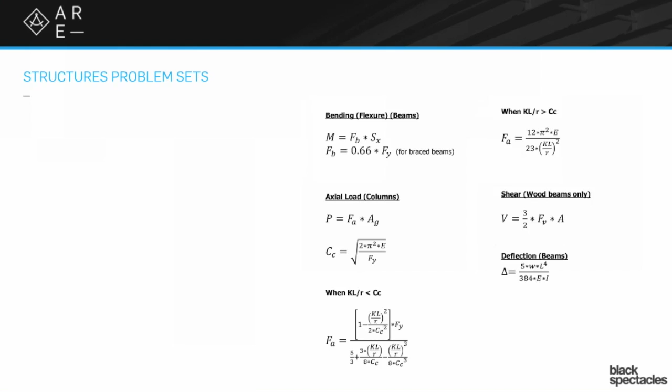And in the middle of some of the questions that we sent out to everybody before we started, we have some charts and things because you can use those along the way. So these are some of the formulas we might reference back to. But let's start in with the first one.

So on our first one, the question is, where in the beam shown is the moment the highest? Heather: You can use intuition a little bit on this particular problem because as you can see by the dimensions of where the loads are located, everything is symmetric about the beam.

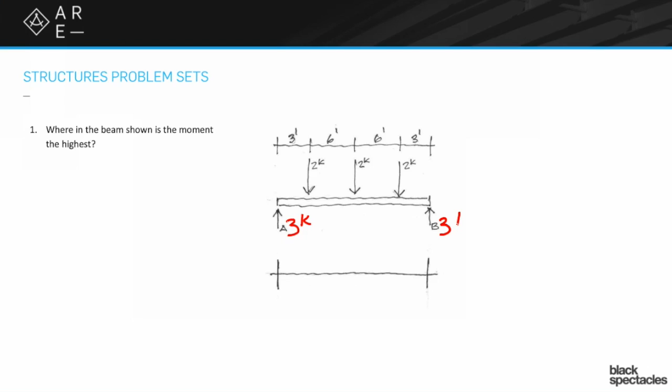By intuition, you can figure out what the reactions on each end are, and they are going to equal 3 kips apiece because I just took the 6 kips total applied to that beam and divided it in half, since everything is symmetric.

If you feel comfortable going by intuition, you will ultimately come to the answer that the moment is highest right here at midspan. But for those of you who don't feel comfortable doing it that way and want a bit of the math behind it, we're going to show you how you can get there.

So the thing that'll get us there is we're going to draw the shear diagram for this beam—I've always been curious why you use V for shear, but that's one of those engineer speak things. We're going to start the shear diagram and follow the loads: go up 3 kips, and since there's no load applied, go straight across, then come down 2 kips.

So we come down 2 kips, then go across again until we hit the next load, and come down 2 kips, which takes us across the 0 line and puts us at -1. Then we go straight across, down 2 kips, straight across, and close it up with that last 3 kips.

Now, the one thing to know about your shear diagrams is whenever that shear diagram crosses 0—this point right here—that is your maximum moment. So when that shear diagram crossed the 0 line, we essentially just answered the actual question right there.

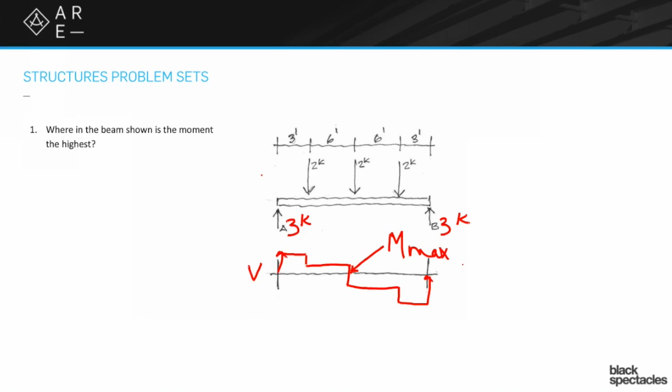It happens to be right in the middle because this one is symmetrically loaded, and you could have guessed that beforehand if you'd been thinking about it. But this is a clear description of why that's the case. So let's move on to the next question.

Why don't we go ahead and draw the moment diagram? Okay, so let's do that—just for fun, because what could be more fun than drawing a moment diagram?

So yes, we are going to draw that moment diagram, and you need to know a couple of things that I'll describe along the way. The first is to figure out what number you're going to go up to—we're going to take the area underneath this shear diagram.

So we basically have a 3—we went up 3, so this value here is 3. And you're going to take the area of it, so it's 3 times 3, which is 9. And whenever you have a straight across, a box shape in your shear diagram, you're going to get a diagonal line in your moment diagram.

So we're going to go up to 9, and then keep doing the math—this is 1, and it's 6 feet long, so we're going to go up another 6 to the center, bringing us up to 15.

So you're kind of separating those out as different boxes—the first one was the 3 kip amount over the first 3 feet, then you jump to the next box, which was 6 feet long but only 1 kip high. Right, and you're just adding it up as you go along.

And then because we crossed the 0 line, these are all negative, so we're basically going to come down those same numbers. You're going to come down a total of 6 to +9, and then come down the rest of the way to 0. That line probably shouldn't have been so straight looking, but there you go.

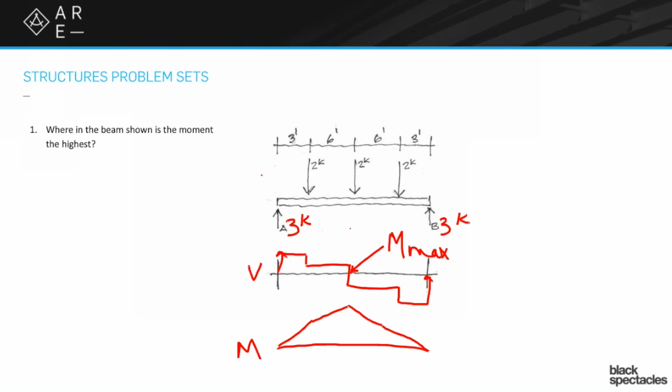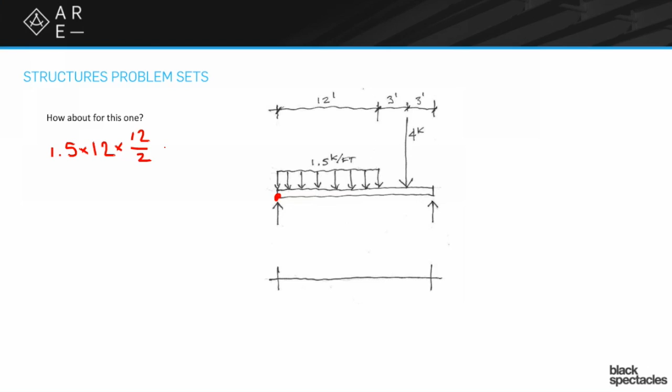So it's 6 feet. The first 1.5 times 12 is actually the total load that you're talking about. The 12 foot is, because it's 1.5 kips per foot, in order to know the total load of that particular one, you have to multiply it by the 12 feet. But then the moment arm is half of that distance. And so keep going with the next set of loads.

So the 1.5 kip per foot is going to act in the same direction as that 4 kip load, and it is acting 15 feet away from this left end. When we do this, all of this has to sum up to 0, because otherwise we don't have a static beam here. You don't want your beam galloping down the road, flipping around. So I'm going to call this other end here B, just to give us a value, but it is acting in the opposite direction that the other two loads are. So it's going to have a minus sign, and it is acting at, let's see, that's 6 and 12, that's 18 feet.

And when you solve for B, it actually comes up to 9.33 kips. Then you can sum your forces in the vertical by saying this 4 kips plus the 1.5 times 12 to get it to a total load, and then subtracting off the 9.33 gets you to the reaction over here, which is 12.67.

So when we draw our shear diagram here, we're going to start doing it the same way we did the other one. So we're going to go straight up because we've got that 12.67 kip reaction, but we have a distributed load, so you got to treat that a little differently, because every foot you're taking off more load. It's not like this concentrated load where it happens all at once. So because it's a distributed load, I'm just going to draw some guidelines in here for myself because that's how I do things.

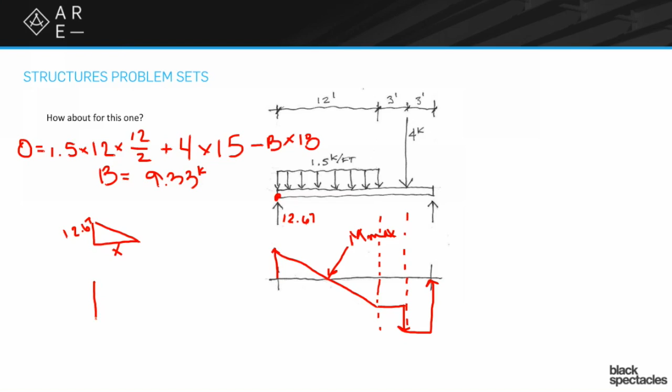But we have to figure out what it is, and there's a couple of different ways you can do it. I like to use similar triangles because it's graphic for me. So I have one triangle that's 12.67 over some unknown value, but my other triangle has to be the whole thing, the total of 12 feet down here, but it's 12.67 plus the 5.33. When you solve, you can do your ratios and solve for x, and you get a value of x, which is 8.45 feet. That's how far away from this left end that point of zero shear is.

And so that tells us our basic question, which was, where is the highest amount of moment? Correct. And we figured that out through a combination of using the shear diagram, understanding what the shear diagram was telling us, and then doing a kind of quick, fast graphic version.

But we also could have done a moment diagram. We could have done a sum of moments and then figured out distances. There's a series of other things we could figure out as well. I guess the one thing this helps you with is, yes, you could have drawn that moment diagram, but if you're feeling crunched and frantic because of time, don't feel like you have to do that. By knowing that your point of zero shear is your maximum moment, you've saved yourself some time.

But just because we're masochists like this, let's go ahead and show that, just to have a moment to discuss what these things look like. So now, again, we have to think about that the point of moment is based on the area underneath this. I haven't done this math, so I'm not going to put values down, but I'm going to draw what the diagram looks like. Yeah, so this is just sort of approximate.

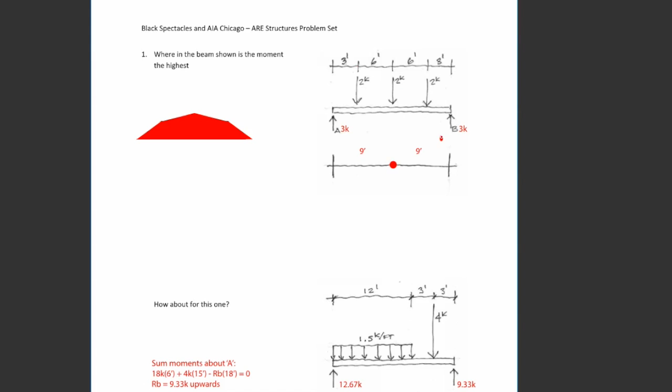Okay, so on the first one, looks like Spencer got it pretty spot on. In fact, his drawing looks a little better than ours. Let me take a look at the next one. Okay, here's the next one. We got the reactions right, and he didn't draw the shear diagram, but it looks like he got the end value. Yep, it all looks pretty good. You can see all calculations there, and he's summing all the forces.

And again, this is one of those things, you don't necessarily need to do the moment diagram in order to understand where the maximum moment is, as long as you understand the relationship between the moment diagram and the shear diagram, which obviously is also related to the loading diagram. Okay, way to go, Spencer.

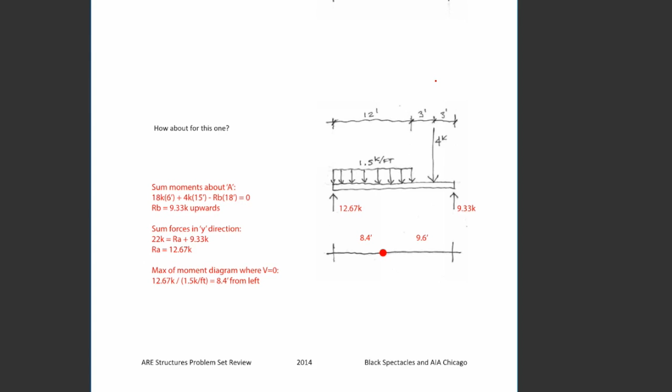All right, let's go back to the things here. All right, and going on to problem number 2.

Problem number 2: you were working on a hospital in Japan in an area of high seismic risk. At a preliminary design review, there are various concepts being considered. Which is the most sensible approach? We've got an 8-story L-shaped building, a 6-story symmetrical plus-shaped building, a square building, and the rather restrictive option that you should not build a hospital in a seismic zone.

What do you say about the L-shaped building? Well, the L-shaped building could work. It has one piece to it that we don't like as much as the rest, and that is this little inside corner here. If you imagine grabbing this end and this end and wanting to move them back and forth, you'll see that this spot right here just kind of wants to rip apart right through there. Not that you can't build this way, but it wouldn't be my favorite choice. You'd have to put a lot of extra structure in there in order to do that.

So what you're essentially saying is that each of those wings is going to start shaking on its own, and they're going to kind of crunch into each other at that inside corner. If you really like this choice, I would probably say build it this way, where you see a joint between the two, so they have a way to move separately and not hurt each other.

Exactly. How about the plus? Well, the plus is going to be obviously the same thing, just 4 times, right? Yep, exactly. The plus has a lot of what we call inside corners, or re-entrant corners. From some of the handout material that you sent out, there are some code tables that were pulled together, and it's one of those things we have to design around and make the structure more robust, so we're spending more money on structure instead of all the pretty architecture.

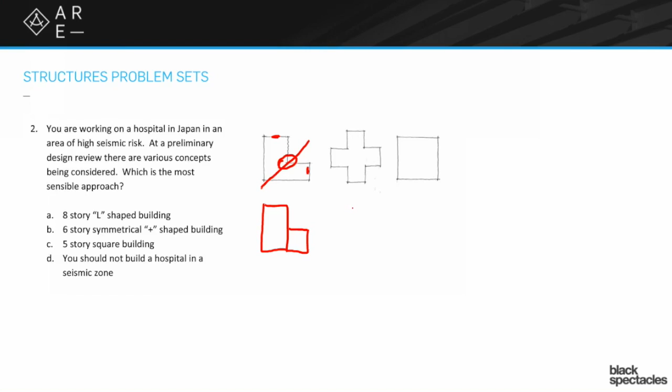And that's what we like, pretty architecture. So if you look in the problem set handout, there's a couple of sheets in there that give a bit more information about re-entrant corners and things like that. So obviously we're coming down to it.

C is clearly the answer, the square-shaped building. And the reason for that is just because it's all going to move as one. Yeah, and it's symmetric, so we love symmetry for seismic issues. It allows us to be centered, if you will, about where the mass of the building is going to work, and that's usually pretty close to the center of a square. So yeah, our choice would be the square.

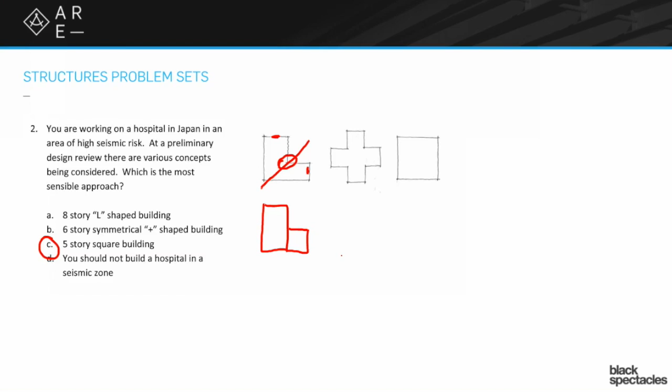One of the things you'll find is that often on the exam, there'll be things that say you should not build this or do that, and those are not usually logical answers. They may seem logical at different points, but you can always do it. It's just a matter of where you want to spend the money. Since the exam is often about the idea of efficiency, this is a good example of why D is just not a reasonable answer in this context. All right, let's move on to the next one.

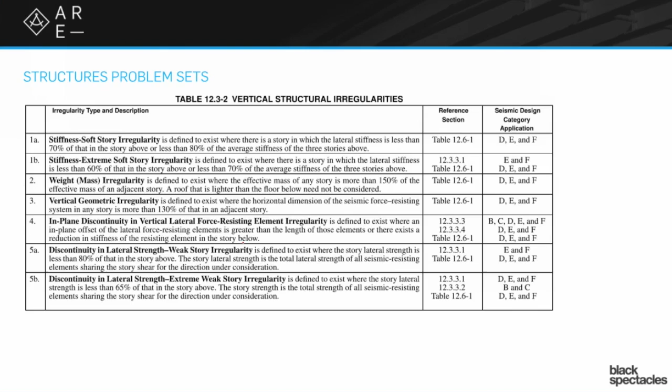So these are the code tables we were mentioning. Right, so these are in your handout. There's a couple different code tables that you can look at. So here's question number 3.

Question number 3: the contractor is about to place the concrete for a complicated but important structural wall, but something seems a bit off and you are worried. Which concrete test would you look at first for reassurance? We have a couple different answers: hydration test, core test, slump cone test, cylinder tests, and penetration test.

So the key thing here when reading this question is that time seems of the essence, that something's wrong, and before things get too set in place, you want to check if things are going reasonably correct. A couple things we can do right off the bat is get rid of a few of these choices. One we can get rid of is A, because hydration test I just made up.

So that's not a real thing. Maybe it's a real thing, I don't know. Maybe it is, but I made it up either way. And then core test and penetration test, those are things you would do down the road.

The core test would be something you do on an existing structure to figure out what your concrete strength might be. That'd be one way to do it, if something was going wrong and you wanted to test it, or maybe it's an existing building and you're trying to see if you can add more load to it. So the core test is a real thing, but it's just not something you'd do in the way the question described.

I think the penetration test is sort of similar. So the two main ones you're likely to be asked about would be the slump cone test and the cylinder test. The slump cone test is where you have a cone-shaped formwork piece, about 12 inches tall. You put in concrete from a particular truckload that's about to go into place, then flip the cone over and lift it off, and see how much it slumps down.

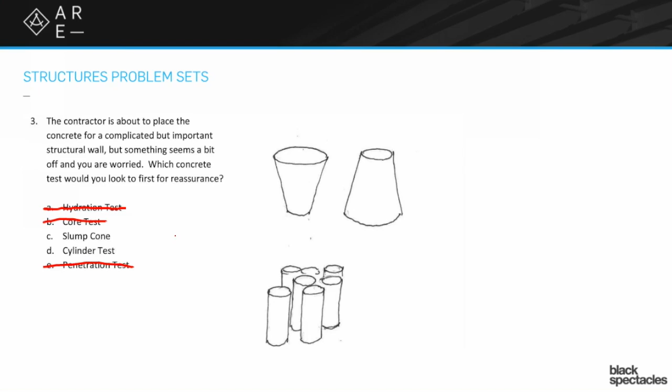Well, that's great, but as Heather says, that's 28 days later, maybe 7 days later. You might do an early test because you can get a pretty good sense of it, but it's probably way later. So the way the question was worded, talking about 'I'm worried, I want to find out what's going on,' the slump test is definitely more useful in that context. And I can guarantee you there'll be questions about slump tests and cylinder tests somewhere. I'm not sure how it'll be worded, but there'll be something, because it's kind of a key one.

Right, how did Spencer do? Let's take a look and see what happened with Spencer. I'm going to have to bump forward a couple here, but let's see how it goes.

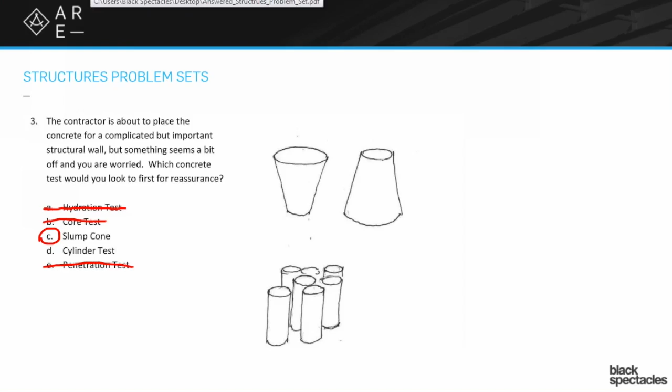So let's see, you got the square building, and Spencer got it right. All right, you're doing great, Spence.

All right, let's jump on to question number 4. This one's going to take a little bit of calculation. The framing plan shown is for a 2-story simple light manufacturing building. The loads are axial loads only: live load of the second floor is 80 PSF, dead load of the second floor is 20 PSF, live load of the roof is 30 PSF, dead load of the roof is 20 PSF. We're going to ignore the first floor slab on grade since it's being held up by the ground below.

So we have 2 basic questions here. The first one is, what is the total load of the column that's been indicated? So what's the first thing we need to figure out? Well, first you need to know all these loads, and we're going to add those up in just a moment. But the big thing to understand is how the load even gets to the column. The big key word here is tributary area.

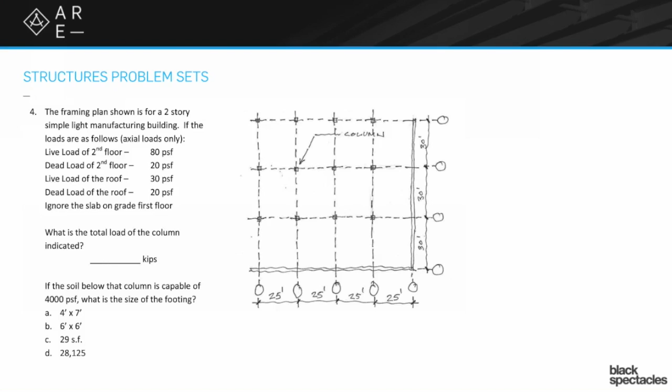Basically we are going to have half of the bay in each direction. I'm just going to draw a square here for you - this is basically the trib area that column is going to see. So half of the 25-foot bay in each direction and half of the 30-foot bay in each direction is going to contribute to the load that goes down that column.

So we know the area is the 25 and the 30, and we're going to multiply it by our load. Doing some addition: 80 and 20, that's 100, and another 50, so that's 150 PSF. You could do this by calculating the second floor load and the roof load separately and adding them together, but what I'm doing is just putting it all into one calculation since we just wanted the load at the bottom - a little shortcut. If you add them all up and multiply that by the area, that gives you the 112,500 pounds.

Right now, if you notice, you want your answer in kips, but right now all my units are in pounds. So you will have to divide - for those that maybe aren't as aware, there are 1,000 pounds in one kip, so we have to divide this whole thing by 1,000. Our final answer here is 112.5 kips coming down that column.

This is one of those things you have to definitely be watchful for, because while they're not generally trying to go out of their way to confuse you or be mean about it, there often are answers that, if you didn't notice the word kip, would be a version very close in pounds. So it's kind of taunting you to choose the pounds one, even though it says kips. You have to be really careful about matching kips and pounds, feet and inches - all these kinds of issues show up all the time on this. Units are a huge deal.

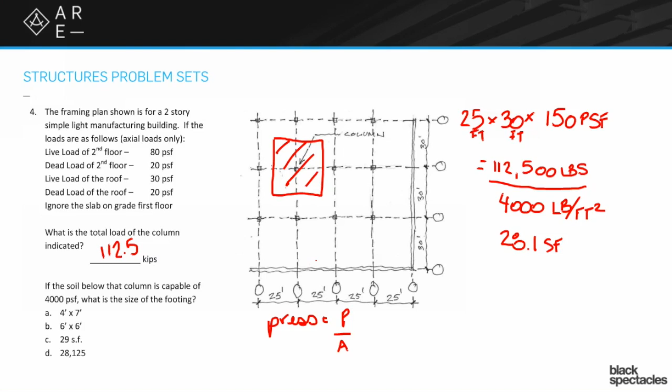But the 29 square feet sure looks pretty good because that's just bigger than the 28.1. So that's really the answer. Some folks may have seen a different possible answer. So let's take a look at what our submitted one said. Let's see what they liked. If I can get this to work. Oh, there you go. It's all Heather's problem. All right, here we go.

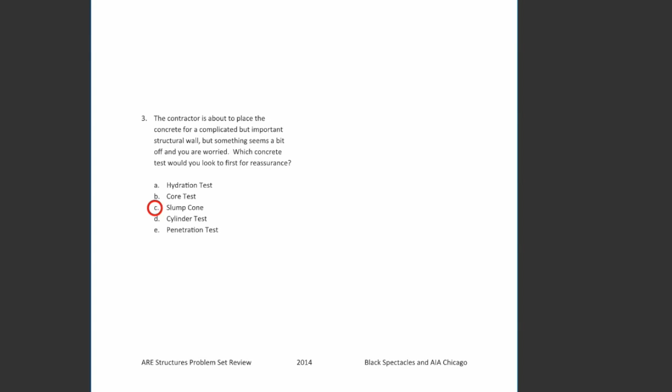So on this answer, they chose 6 by 6, which is an interesting answer because, on the exam, there will often be more than one correct answer. And in my mind, the 6 by 6 is a correct answer. It's just not as correct as the 29 square feet answer.

The reason I'd say that is anybody who's actually done concrete work knows that if you start giving people an answer like the footing should be 5 feet 2 and 5/8 inches, yeah, they don't build to that. They just don't build to that. It's just not how concrete works. So generally you're going to round up, maybe to a 6-inch line or maybe a foot line, something like that. Maybe if you're being more tight and controlled, maybe every 2 inches or something. But a 6-inch thing would be fairly typical.

So I could imagine that if our answer is really 28.1 square feet, you start thinking, well, how big is that? If we did 5 by 5, is that big enough? Well, no, that's 25 square feet. So it's not 5 by 5, it's the next one, it's 6 by 6. So it's a reasonable answer, but it's just a little too wasteful in the context of the exam. If it had said 5'6" by 5'6", that'd be a closer bet and I think that might be a reasonable answer. I think the 6 by 6 is just a little too far off, but you can see why they answered it this way.

And looking at D as an answer, it's the math, it just has a units issue in it. It's just a unit issue, right? Because that's exactly - that's one there to taunt you to do it wrong. All right, let's go on to the next one.

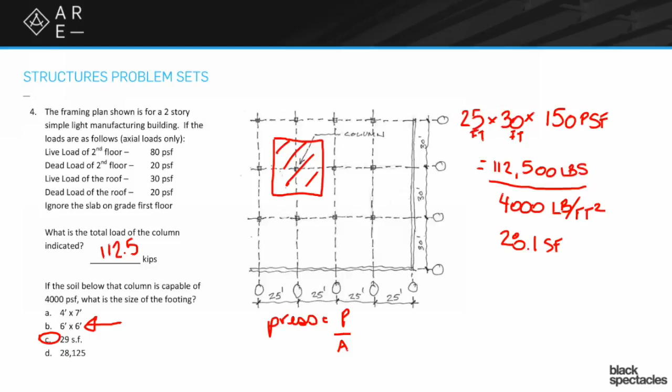Okay, so this is number 5. You're in the middle of the SD, schematic design part of the set, and the architect realizes that zoning height limitations may be a problem, and therefore must get a reasonably accurate typical floor-to-floor height for the design on a mid-rise office building, presuming a 1 kip per foot loading, and that the beams are 20 feet long. You are likely to use A50 steel. What wide flange would you use?

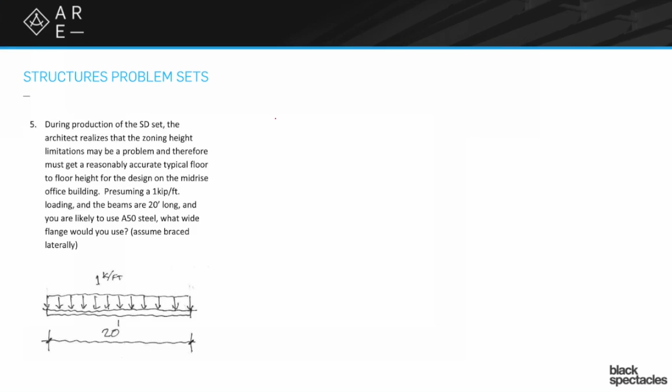So, okay, there's a couple of things. For one, we have to do some quick calculations. We do, yes. And then beyond that, we're going to have to do some other stuff as well. Yes, we are. So let's just dive right on in. So one of the equations you're going to need to know is moment for a simple span beam with a uniform load.

And you've hopefully come across this once in your lifetime, but WL²/8 is the moment equation. Like I said, most of the time the formulas will be given to you and you don't really need to worry too much about it. You can actually find them, but there are some that are probably worth just memorizing to have in the back of your head. This would be one of those, because it just shows up enough, and why make it more complicated?

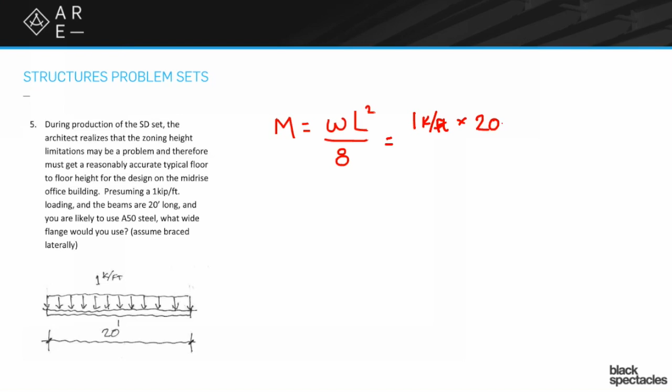So now we're going to just do the math, and we have this happening. And you end up getting, I believe it's 50, if my notes read correctly. Yep, so we have a moment of 50 kip-feet.

And we have some critical information, before we flip to the next page, which will help us pick our beam size: it tells us we're going to use A50 steel. So it's 50 KSI steel, and it also says we're fully braced laterally, which means you don't have to worry about not choosing the best beam you possibly could, because it's nicely braced. So that's a typical situation for a beam like this.

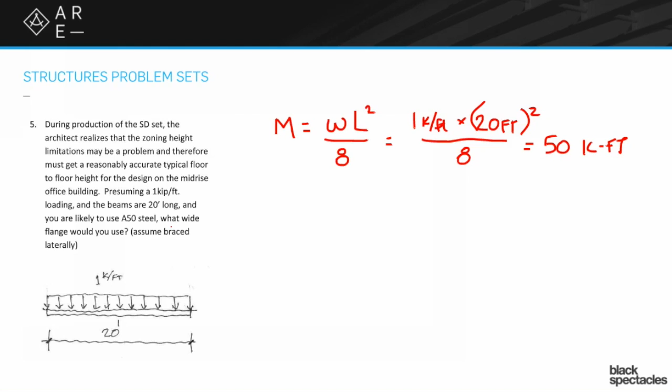So here goes the key thing to understand about wide flanges and the idea of efficiency, especially regarding the exam. When you're talking about structures and efficiency, you're essentially talking about dollars. Well, how do you understand dollars in steel? It's about weight. And since the wide flange—the first number is the nominal height, the second number is the weight per linear foot—if it's a higher weight per linear foot, it costs more.

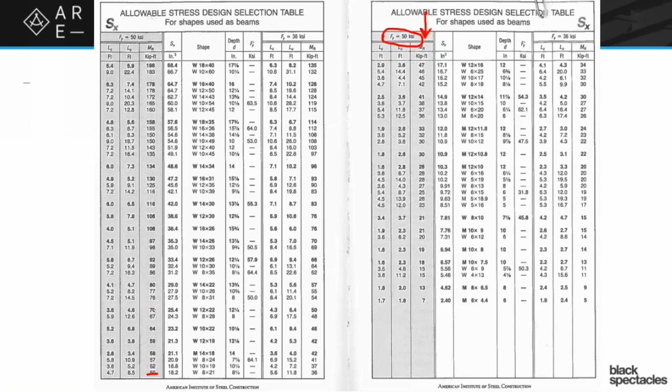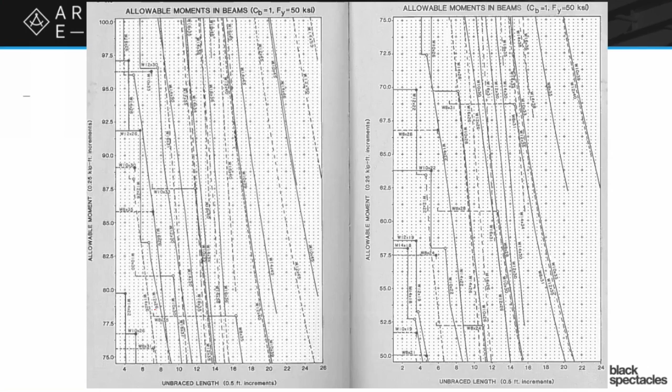Okay, so number 6: which is most likely not to have camber built in? Our choices are composite deck, double T, open web steel LH joists, and wood glulam.

So the first question here is, what the heck is camber? Camber is a natural crown, kind of like this picture shows, where the piece isn't going to come out flat—it's going to have an upward bend to it. One reason we like that is if you think about long spans, if you start out flat, it's only going to keep deflecting downward. So we like to start with an upward crown.

That way, when you start loading—get your roofing on a big stadium or something—it'll bring it down a little bit, and you won't have ponding issues when it wants to rain. So it starts crowned upward, and by the time it gets real loading, it loads into flat-ish. And some are more crowned than others, it kind of depends on the situation. But the concept of camber is that idea of crowning it up a little bit.

So then the question is, of these, which ones are often crowned? Let's jump to double T for a second—what the heck is a double T? It's this shape over here where it's got two stems and a flange.

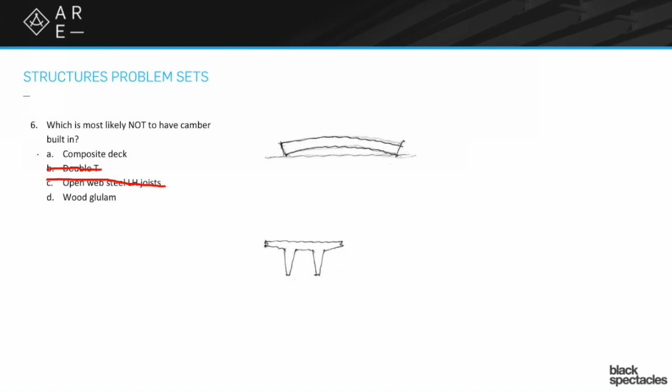What do you want to say about the wood glulam? Well, wood glulam is a manufactured product, so if you wanted to put a camber into it, you certainly can. It's an easy material to put camber into. Because you're making it up, right? Yep, it's one of the ways you can give that wood glulam that little extra boost of capacity, by building in that camber. Then when it does deflect, because it is wood after all, it'll deflect some, and it'll deflect to flat. So while it won't necessarily happen every time, sometimes wood glulams are used more decoratively than for serious levels of structure. But when you talk about a glulam, you're generally talking about a pretty serious structure, and it's very likely to have camber. So we are left once again with A, the composite deck.

So tell me about the composite deck. A composite deck is the fluted material you put on top of your actual structure, which is a lot of times beams. And we don't like to roll deck, it's a difficult material to roll. So if you were just looking at these, I would ask myself, which of these can I actually camber? This one pops immediately into my mind as something that, while you could camber it, it's very difficult to camber. And it would be hard to judge how much you had cambered it. One of the things, though, not to be confusing about: a composite beam system typically does have camber in the beams.

Because you're getting the benefit out of the concrete in the deck, while it's under a wet condition, it needs a little bit of oomph to not deflect and have this big ponding situation in the concrete. So if this had said not a composite deck, but the composite beam system, then that also could have had camber in it. Correct, but because it was just talking about the deck, that may be a little bit of a cheat. I don't know, I think it's a reasonable response.

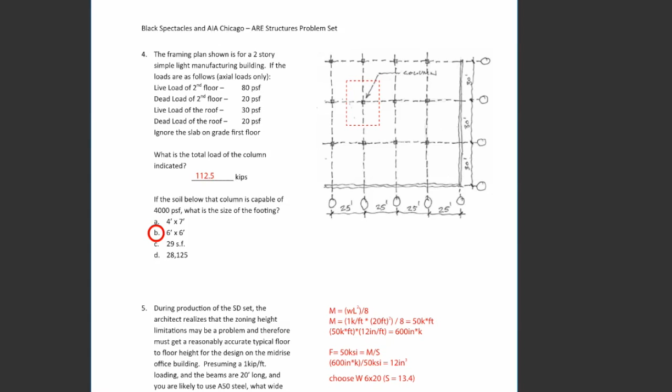So shall we take a look at how Spencer did? Let's see here. So this is the previous one, let's look at this. Yep, you got composite deck. So he's just batting almost 1,000 here. Yes, he's awesome, doing quite well.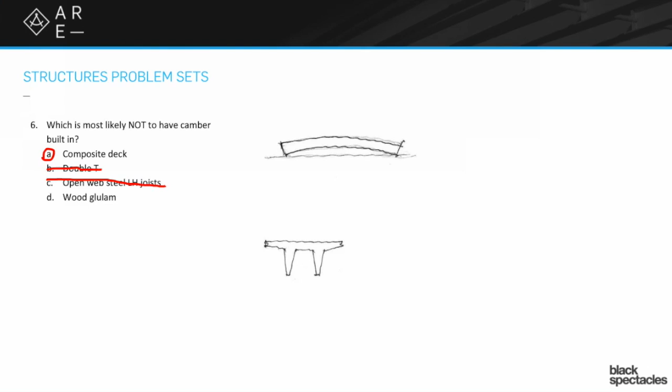All right, so let's jump to question 7. So question 7: you have a wood structure, and the engineer says that the horizontal shear stress capacity of the 2x12s is lacking, but you don't trust her. Huh, I wonder who we could be talking about. As she has been on Facebook. Not me, I have been on Facebook all day. As she's been on Facebook during the entire conversation, you decide to check for yourself. If the highest shear stress allowable for Douglas fir larch is 180 psi, then does this loading work?

And so we have a beam here. It's intriguingly symmetrically loaded, I love it. So tell me about it. Okay, so we need to think about what is the shear through this beam. The maximum shear through a beam like this is going to be at its end span. So by seeing that it's symmetric, I'm just going to use my judgment and say that it has 1 kip of reaction at each end of the beam. And from there, that's our shear. But now we have to figure out how much shear stress we have.

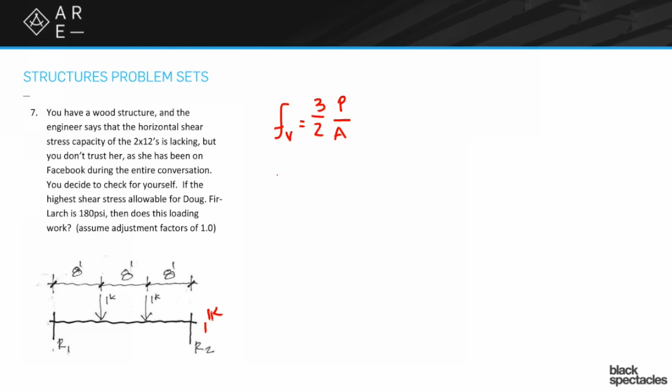That's going to be an equation that, unfortunately, in wood is a little different because of this first factor I'm going to put in front of you. But let me write out the whole thing first. In wood, because you're dealing with a material looking at horizontal shear, and because your point of worst shear is actually when you go vertical through the section and you're trying to split apart those horizontal grains, that's where this 3-halves factor comes from—it's a lot of differential equations in converting a vertical shear into a horizontal shear. So this is just a factor you have to remember in wood, specific only to wood. But then we're still going to do the normal load over area. If this was on the actual exam, they would definitely give you that formula somewhere, maybe in the front of the exam or in the question itself. So now we're going to basically finish filling in the equation.

So again, I told you that this was a constant, and we know P, we know that that is 1 kip. And then we can figure out the area of a 2x12. You've got to go back to thinking about what the dimensions are.

Here's the whole important thing to remember. This is one of those things that used to get drilled into every architecture student in the country, but I know has sort of slipped by a lot of folks these days. A 2x12 is nominally named a 2x12, but it's not actually 2x12. It is in fact 1.5 by 11.25 inches.

If we were talking about a 2x4 or a 2x6, it would be 1.5 by 3.5 or 1.5 by 5.5. But the 8s, 10s, and 12s all go to the quarter. So a 2x8 is 1.5 by 7.25, a 2x10 is 1.5 by 9.25, and in this case the 2x12 is 1.5 by 11.25. That's one of those things you just got to memorize because it'll show up in lots of places.

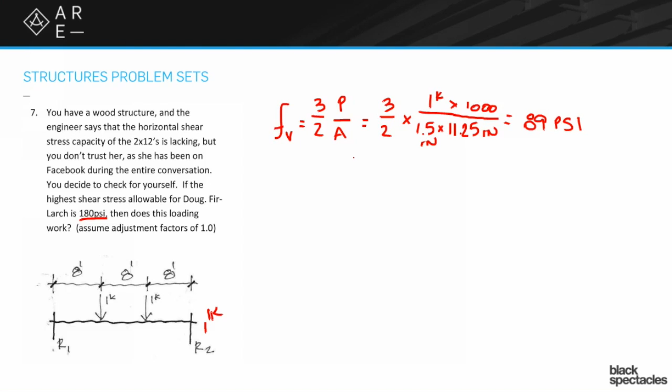So we know that our allowable shear stress is 180, but I wrote the load down as 1 kip, so we do have to multiply by that 1,000 pounds per kip to get our answer. When you do the math here, you get 89 psi. And when you compare it to the 180, you are actually under. So the 2x12s actually have enough shear capacity. There you go. All right, let's jump on to the next question.

Okay, here's a question about columns, and this is sort of a general question. This one is just saying, all right, the current design development set calls for a 10-foot tall W10 by 33 column in a building that you are working on. And the question is, what are the most important elements for understanding what the maximum allowable load would be for that? Imagine you have an assumption, you put it into place, and now you're trying to figure out what issues would be at play here.

So we've started with a couple little sketch images there to help us along. What would you say the basic worries here would be? Well, the first thing you want to think about is what contributes to figuring out the capacity of a column. You're really thinking about, is it tall and slender? Is it short and squatty? And you may have heard this little equation here, KL over R.

The different parts of this equation are the most important pieces to be thinking about. K goes up here to these diagrams. It basically is having you think about what are my end conditions. This first one shows a pin-pin. The second one is a flagpole kind of condition, so it has a fixed base. And then the third one shows you two fixed ends.

Because the two fixed ends come out of the fixity at 90 degrees, unlike the pin, which can rotate around, you get a very different curving happening. So the value changes as you go through these. I happen to know that the pin is a 1.0, and I believe the cantilever is a 2.0. This one I have no idea off the top of my head. Yeah, we'd have to look it up. But you can see how they change depending on what fixity you have.

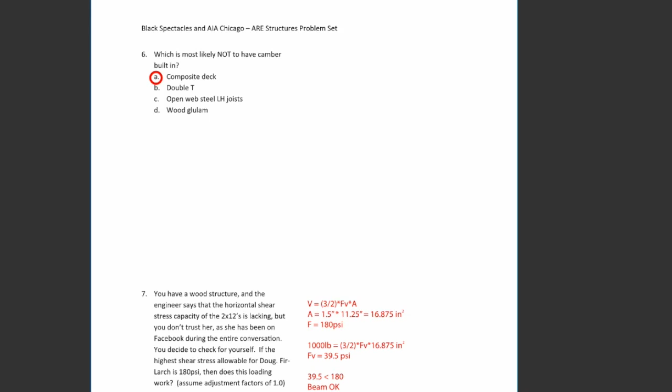So he's saying tributary area and radius of gyration. Tributary area is not a bad answer. What that's saying is that the area that's going to contribute load to that column would be a significant thing to think about. That's getting into the loading of the area and how much load per square foot we probably have versus the shape itself. I think that's a reasonable answer as well.

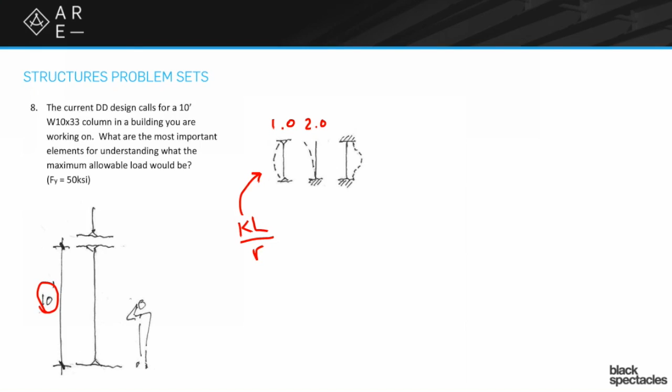Okay, so we're on number 9, and it says: does the wood 3x6 beam work for deflection with the loading shown? It says the E, the modulus of elasticity, for Doug fir is 1,900,000, and it gives the moment of inertia for the 3x6 as 34.66 inches to the fourth.

Yeah, so this is fun stuff. This is an exciting one. Check out that formula over there. Here is your deflection formula: 5WL to the fourth over 384 EI. I know it looks a little crazy, but it's not too bad. We can plug everything in and take a look at the result. The 5 and the 384 are constants, just part of the equation, but we're going to fill in the rest of it. W is 500 pounds per foot.

And then L is 15 feet, to the fourth power, and we're all over the 384 and the 1.9 million. What wasn't told is that's actually in PSI, pound per inch squared. And then we were given I, which is 34.66 inches to the fourth.

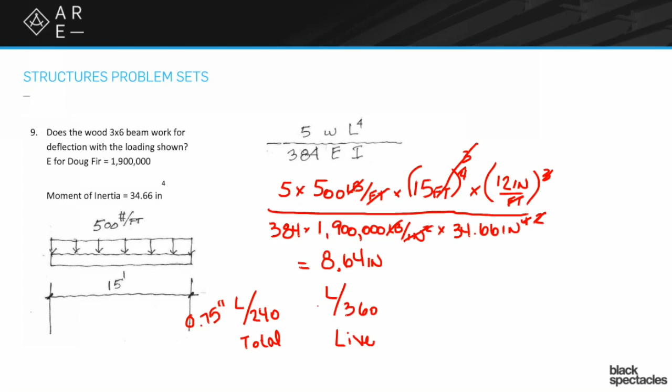But if that number had come out to say half an inch or 5/8 of an inch or something, it'd be fine. Even if it came out right to 3/4, it'd still be fine. But then there are some very specific situations where you could imagine a question that's much more higher tolerant, because there's a very particular need, like the masonry or something. But the vast majority of them are going to be either this L over 240 for the total load or L over 360 for the live load.

Correct, yep. So knowing that we have so much deflection, the easiest way to change that is to figure out what's in that denominator and make those bigger.

Do you have a question about how you converted the units? Oh yeah, so basically when I did the units, I wrote them out all longhand so that I could see what I had in each fraction, if you will.

Yeah, that's one of those things. You do it a few times and you'll get reminded of it, but it's tricky. Yeah, it takes a while to get used to that. And this is one of those ones that is always problematic - if you're going to have trouble on units, it's going to be in a deflection one, because it's just sort of the nature of it.

But before we move on, let's take a quick second to talk about this formula a little bit. This thing can seem very complicated, and they may ask you to do a full calculation. But it's also possible they may ask a question you can answer just from understanding the issue here. So let's say, for example, we figured out that this particular example just isn't strong enough to handle it, and it's going to have way too much deflection. So what could we do to fix this problem?

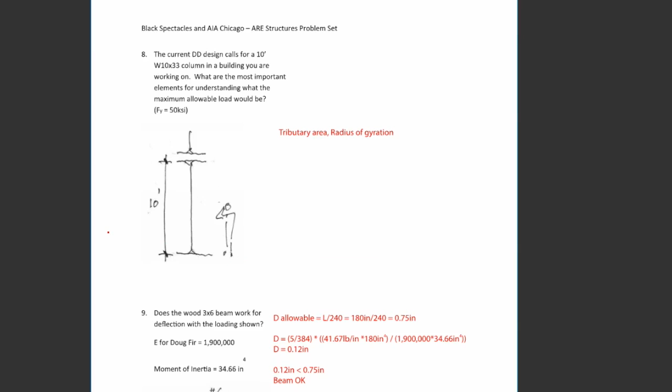Let's take a quick look at what our friends at home - what our respondent said. So this one, we look at number 9 here, and we see that they got the L/240. That looks good. So figured out the 0.75 inches, the 3/4 of an inch, and that first run, 5 over 384. So everything in that first line looks pretty good, but came out with a different number.

Yeah, so we think there might just be a bit of a calculator error. I know my fingers get fat sometimes, and I punch the wrong button.

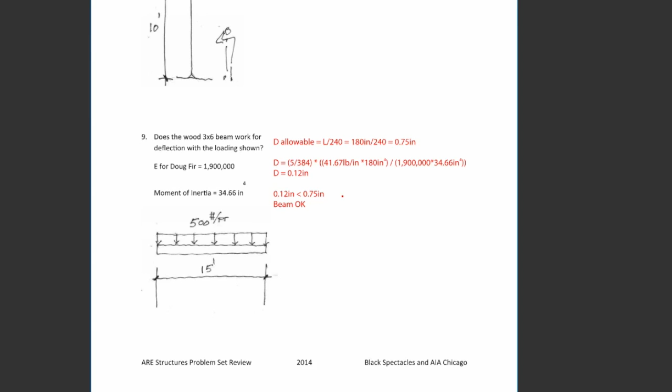Yeah, I'm not exactly sure what happened there, but everything, all the setup looks right, but then something's not quite right in the final follow through. It might be a units thing, but I think it's probably just a calculator error. All right, let's jump back, and we'll go on to our last one here.

All right, so this is for number 10. For the belled caisson with the soil boring report shown, calculate the axial load bearing capacity for this foundation element. Assume the topsoil is organic material and provides no bearing capacity.

So we have here a belled caisson shown in section, and then the bearing capacity of the soils, all the different levels of the soils from the soils boring report. It starts off in the top level with topsoil, then there's some silty sand that has a 1200 PSF capacity. Then we have sandy gravel, which has 2200 PSF down below that. Then there's a couple of mixed ones, gravels and sands and silts and such at 2,900 and 3,200. And then down there's bedrock at the bottom there at 10,000 PSF.

So which of those numbers are we going to really care about? Well, I don't know about anybody else, but if I'm going to put a caisson in, I want a nice big number, so I like the bottom one. Yeah, essentially, this is a total red herring. All of this extra information, the only one you care about is that 10,000 PSF down at the bottom. All of those other silty sands and all that stuff might be useful for a different foundation system if you were doing a raft or a spread footing somewhere higher up.

But the entire point of a belled caisson is you're reaching way down to get to some very good soil, hopefully bedrock, although not always. And then you're going to bell it out. You make that shape at the bottom where it's a column of one size for most of it, but then when it gets down to the very bottom, it gets wider. The whole point of that is just to get more bearing area down at the very bottom, so you're not having to do a full 8-foot column all the way up - that'd be a huge amount of concrete. So you do the 4-foot column. In this case, it's 4 foot, lots of different sizes, and then it bells out to 8 foot down at the bottom.

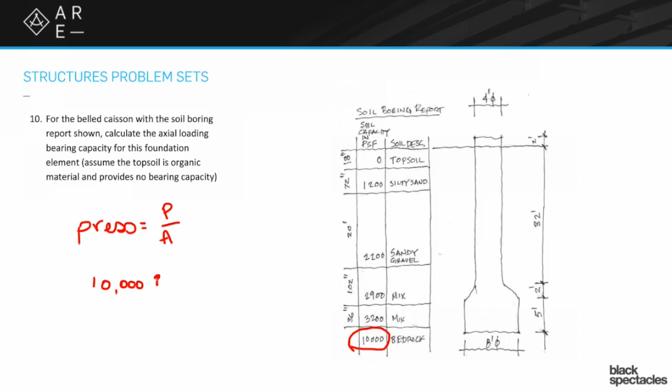So we want to take that 10,000, and it's, let's see, it was PSF, I think, is what you're giving everything in. So we know it's 10,000 PSF times the area, and the area is that circle down here at the bottom. Down here, we want the area of that. So I'm going to write it out in terms of diameter, but it is pi r squared. I tend to think in terms of diameter too much today. So that's how to convert it - I totally would have done pi r squared, but okay, yeah, we got you.

So the 8 over 4 is... so when you do the math, let's see, where's my cheat sheet here? When you do the math, you get 500... you can write it as 502,000, or 502 kips. So that's the answer. That's the total capacity for that size of belled caisson on that capacity of bedrock with the 10,000 PSF, that's what that's going to tell you.

So you're doing the area and then the capacity of the soil, and that's telling us what the potential P is, the potential total load that we'd be able to design for whatever this building is. And this is the kind of thing you have to be very careful of - just because they give you a lot of information doesn't mean it's pertinent. So this would be one of those examples with a lot of red herring information.

Do we have any questions? Yeah, there's a question here about just in general, with the structures exam - are there going to be a bunch of problems, is it going to be just a few? Can you sort of talk about how the structures exam kind of lays out? Yeah, so the question is just about the overall, how the questions work overall.